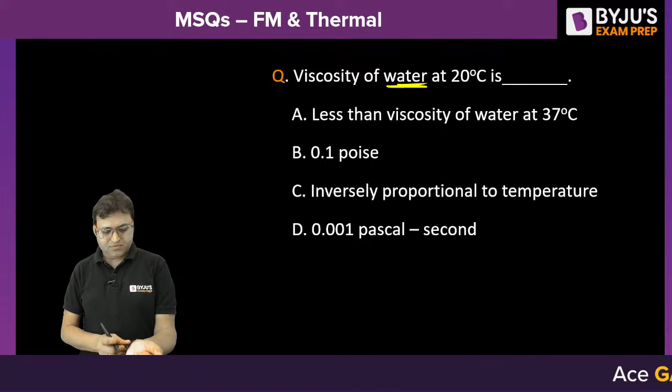Viscosity of water at 20 degrees Celsius. Water is a liquid. Because water is a liquid, can we say viscosity versus temperature? Do you know the relationship between viscosity and temperature?

For a liquid, viscosity decreases with increase in temperature. For a gas, viscosity increases with rise in temperature. This is because in a liquid, cohesive force dominates. I hope you guys are aware of cohesive force. So viscosity at 20 degrees Celsius will be greater than at 37 degrees Celsius.

Is A correct or incorrect? A is not correct. Viscosity at 20 will be more than viscosity at 37. How come A is correct? Rajput, Kumar, why are you saying A? And Sadhana, only B? Remember, all these questions are MSQs.

Viscosity of water is actually 10 to the power minus 3 Pascal second, or we can say 10 to the power minus 4 poise -- sorry, if you want to convert to poise, it is 10 to the power minus 2 poise. Because 1 Pascal second is equal to 10 poise.

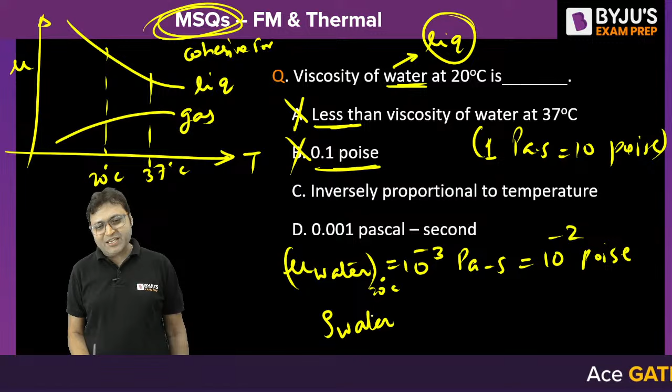Viscosity of water at standard temperature pressure condition, 20 degrees Celsius. Density of water is equal to 10 to the power 3 kg per meter cube. Density is 10 to the power 3, viscosity is 10 to the power minus 3. So 10 to the power minus 3, D is correct. D is correct, and it is inversely proportional to temperature.

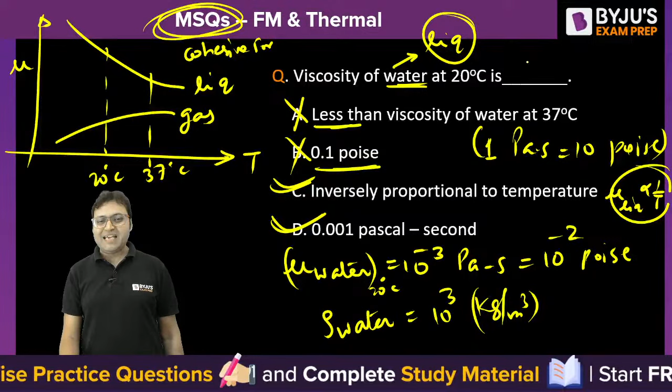Viscosity of a liquid is inversely proportional to temperature. As temperature increases, viscosity decreases. C and D are the correct answers. Nobody gave me the right answer. Do you guys understand it? C and D are the right answer for this one. I hope it is clear.

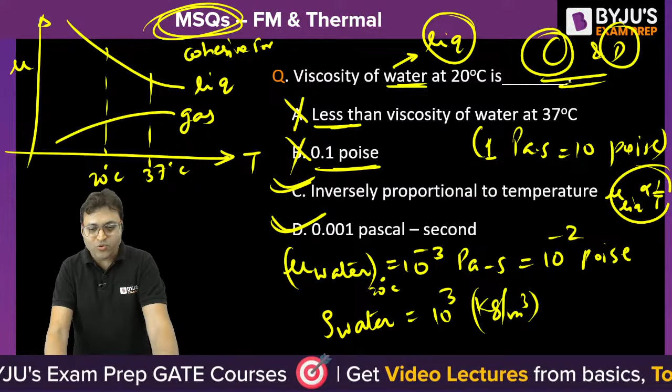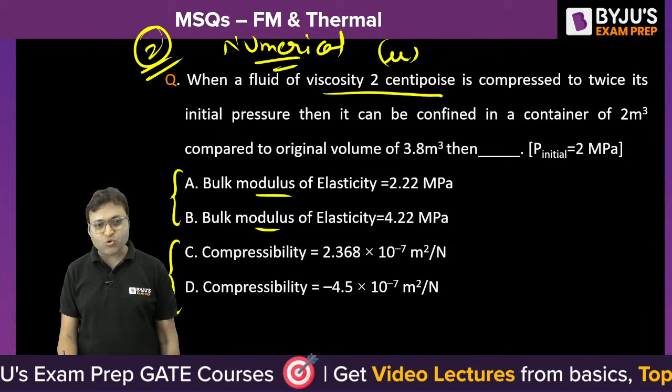When a fluid of dynamic viscosity 2 centipoise is compressed to twice its initial pressure, so P2 is equal to twice of P1, then it can be confined in a container of 2 meter cube compared to the original volume. So V1 is equal to 3.8 meter cube, and the volume gets decreased. When pressure increases, volume decreases, becoming 2 meter cube. Initial pressure was 2 megapascal, so the final pressure becomes 4 megapascal. The question is to find out the bulk modulus and the compressibility.

Do you guys know that the coefficient of compressibility is the reciprocal of bulk modulus? It is the reciprocal of bulk modulus.

That is meter square per Newton. So coefficient of compressibility is reciprocal of bulk modulus. So we need to find out the bulk modulus first, isn't it? So what is the bulk modulus? K is equal to direct stress upon volumetric strain.

Change in pressure per unit change in volume per unit volume. Initial volume is 3.8. What is change in pressure? P2 minus P1, 4 minus 2. That will be megapascal upon change in volume, initial minus final, because there is a negative sign. Why is there a negative sign? To make K positive. So it will be 3.8 minus 2.

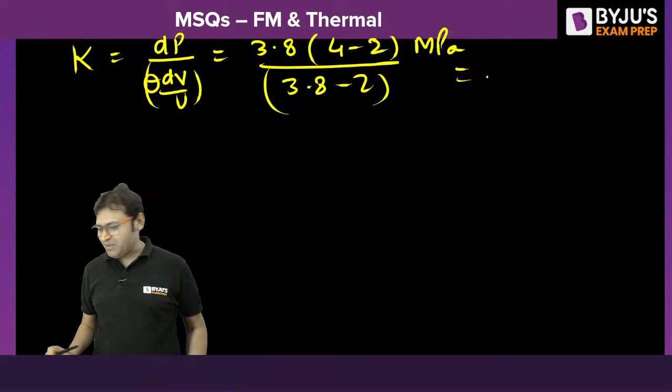Can you solve it? What will be the answer? What will be the bulk modulus? I am waiting for your answer for question number 2. 2 into 3.8 divided by 1.8. It will be 4.22 megapascal. The bulk modulus is 4.22 megapascal. B is the correct answer.

And what is compressibility? 1 upon K. What is megapascal? The options for compressibility are in Newton per meter square or Pascal. So 1 megapascal is equal to 10 to the power 6 Pascal. So 1 upon 4.22 into 10 to the power 6, that is meter square per Newton. 1 divided by 4.22, that is 0.237. 0.237 into 10 to the power minus 6, or we can say 2.37 into 10 to the power minus 7 meter square per Newton. That is coefficient of compressibility.

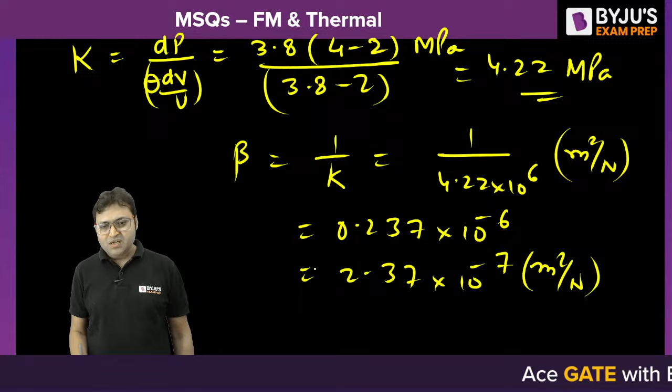Bulk modulus is 4.22 and coefficient of compressibility is 2.37 or 2.368 into 10 to the power minus 7. B and C are the correct answer for question number 2, isn't it?

Yes or no? Hi Maniket, welcome. Good evening, how are you? How was your weekend? How is your preparation going on?

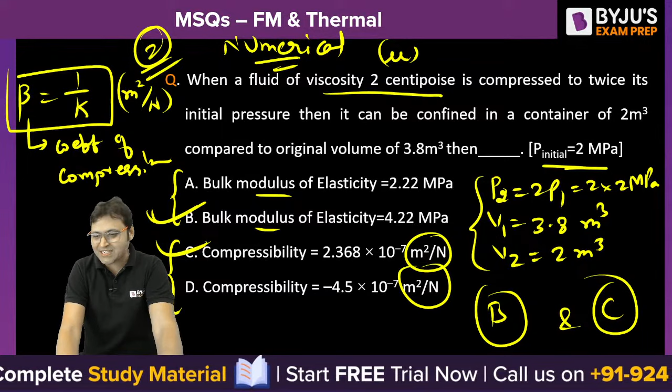Is this all clear to everyone? Everybody please respond me so that we can move to the next one, question number 3. Is this all clear? Simple question, formula based, but because it is MSQ, that makes the question a little complicated.

All right, the next question, theoretical question from the concept of buoyancy. Very, very important concept. Now I am not going to give you the answer. I want you guys to give me the answer for this one.

Yes, Pradeep, Rajput Kumar, Maniket, Archana, give me the answer for this one. Yes, Meg, Bhavya, well done. This is the short trick, the trick to memorize the condition for stability of a floating body.

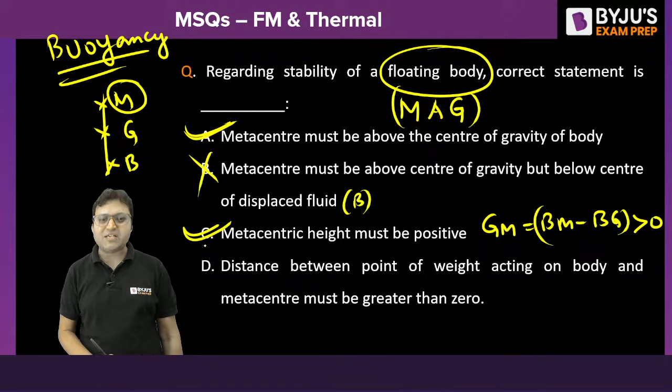Metacentric height must be positive. What is metacentric height? GM, that is BM minus BG. That should be positive. Yes, that is the condition for stability. C is also correct. Distance between point of weight acting on the body...

What is the point of weight acting on the body? Do you agree that is G? And metacenter, that is M, must be greater than 0. What does that mean? Indirectly it is saying GM should be positive. C and D are same statements. Statement C and D are the same.

Statement C and D are the same. The distance between the point of weight acting on the body is G, the point of application of weight is center of gravity, and metacenter M must be greater than 0.

So A, C and D are correct. As long as you are selecting only A and C, you will not get the marks. All the correct options must be selected. A, C and D - are you getting it? C and D are same statements, so if C is correct, D will also be correct.

This was question number 3. I hope it is clear to everyone. Are you guys enjoying it or not?

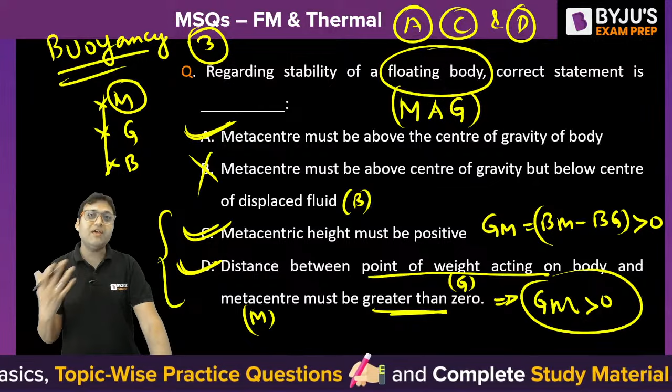The next question, question number 4, is again from buoyancy. Question number 4 is on your screen. Read the question very carefully and try to solve it. Again it is a numerical. Out of A and B, one option will be correct. Out of C and D, one option will be correct.

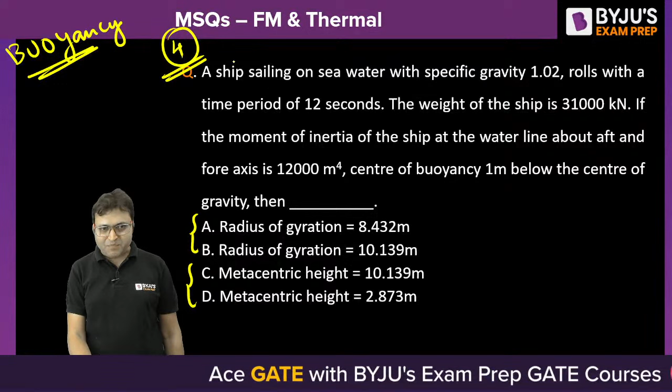There is a ship, a floating body, sailing on the sea water with a specific gravity of 1.02. It means the density of the water is 1020 kg per meter cube. Sea water is slightly denser than normal water because of salt addition, so we need to take the density of sea water to be 1020.

It rolls with a time period of 12 seconds. What is the time period of oscillation? The floating surface always oscillates about the metacenter due to slight disturbance, and the time period of this oscillation T is 12 seconds. The weight of the ship is 31,000 kilonewton.

The moment of inertia of the ship at the water line about the aft and fore axis is IXX, the area moment of inertia of the horizontal section of the floating surface on the fluid surface, and the center of buoyancy is 1 meter below the center of gravity, meaning the distance between B and G is 1 meter.

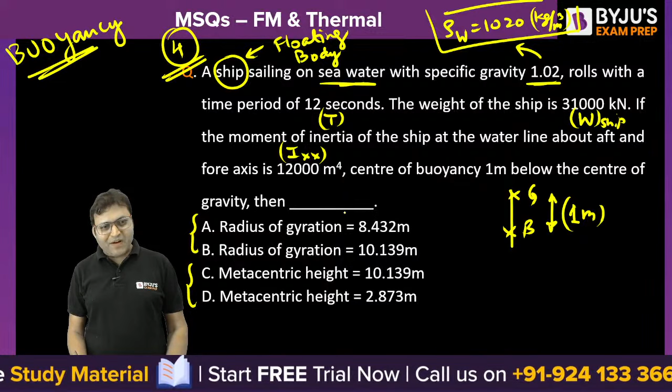Then what is the radius of gyration of the ship and the metacentric height? How do we find the radius of gyration? From the time period of oscillation formula, 2 pi under root of Rg square upon G into Gm, we will find the radius of gyration once we get the value of metacentric height. So first, try to find the metacentric height. Let me make some space. Everybody please give it a try.

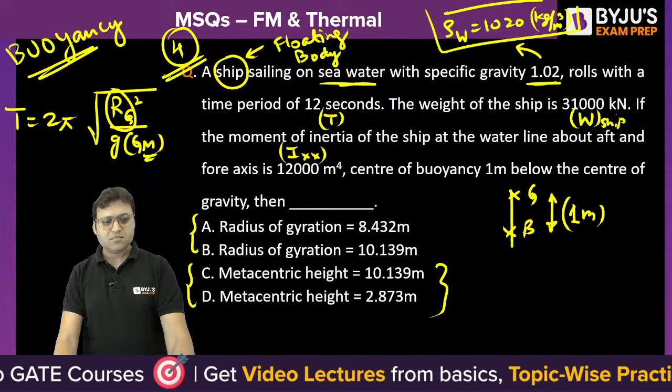Gm, the metacentric height, is Bm minus Bg, and Bm is equal to Ixx upon volume of fluid displaced. Bg is 1 meter. Ixx is known, so what is the volume of displaced fluid? This can be calculated. The buoyant force should be equal to the weight of the ship for vertical equilibrium.

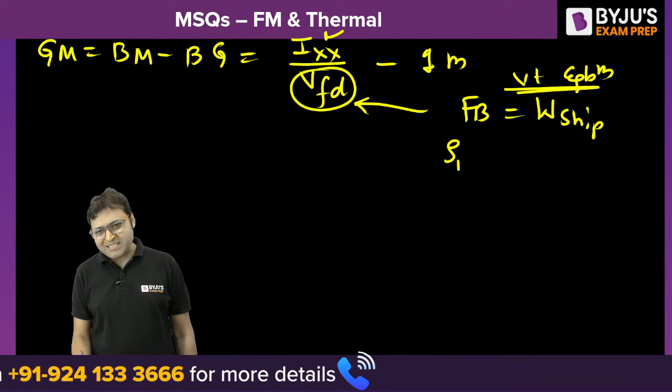For vertical equilibrium, weight must equal buoyant force. What is the buoyant force? Density of water into G into volume of fluid displaced equals weight of the ship. So first we find the volume of fluid displaced. What is the weight of the ship? 31,000 kilonewton, that is 31,000 into 10 to the power 3 Newton.

Density of water is 1020 into 9.81. This will give the volume of fluid displaced. First find the volume of the fluid displaced: 31,000 into 1000 in Newton, divided by 1020 density of water into 9.81 G, giving 3098.08 meter cube. That is the volume of the displaced fluid.

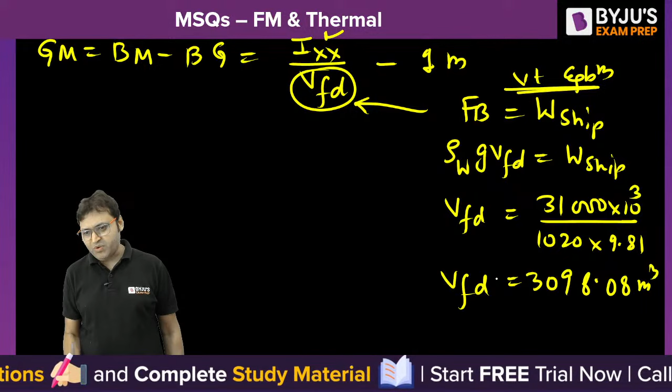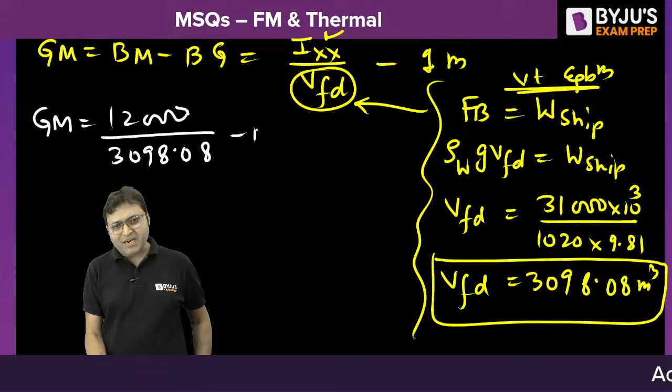Once you get the volume of displaced fluid, Gm will be equal to Ixx, given as 12,000 meter to the power 4, divided by 3098.08, minus 1 meter. Can you find Gm? What will be the value of Gm? Are you getting 2.873? Gm will be 2.873.

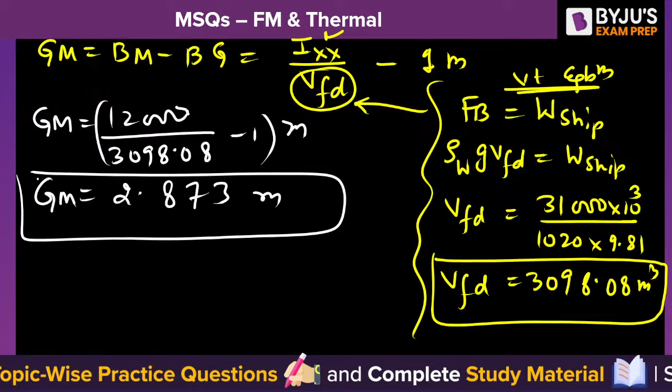Are you getting 2.873 meter? Gm will be 2.873, so definitely D is the correct answer. Option D will be the correct answer.

I hope it is clear, right?

Now what next? Next we need to find out time period of oscillation, 2 pi under root of Rg square upon G into Gm. So Rg will be equal to T into under root of G into Gm upon 2 pi.

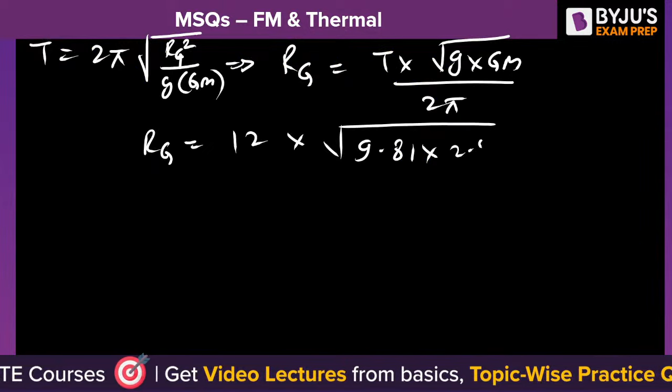So Rg will be equal to, what is the time period of oscillation? Time period of oscillation is 12 seconds. 12 into under root of 9.81 into metacentric height 2.873, divided by 2 pi. That will be in meter.

Can you find out Rg, radius of gyration? Yes, can you solve it? Into 9.81 under root of this, then into 12 divided by 2 pi.

10.139. The radius of gyration is 10.139 meter. Are you guys getting it or not? Everybody, please do let me know.

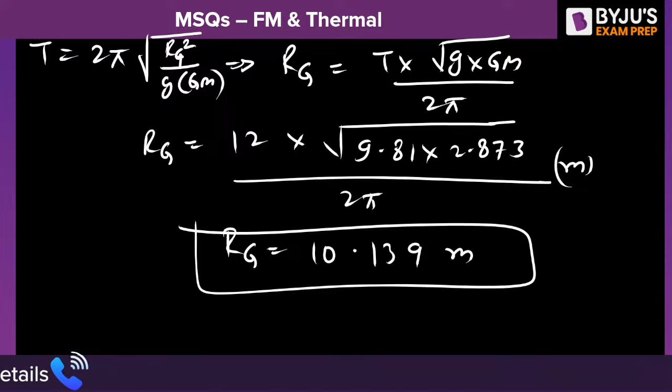10.139. Yes. So B and D are the correct answer for this one. I hope it is clear. Yes or no? Everybody, please do respond. Is this all clear to everyone?

Nobody had given me the correct answer for this one. B and D are the correct answers.

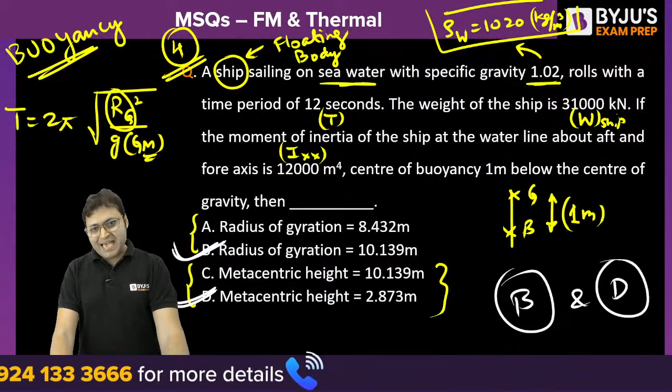The next question is simple. Question number 5. Yes, I want you guys to give me the answer for question number 5. Very simple question. Conceptual, beautiful question. Simple but conceptual.

The question is from the pressure equation, manometry, hydrostatic force, hydrostatic law and Pascal law. Yes, every one of you, Maniket, Pradeep, Sadhna, Kumar, Rajput, waiting for your response. I am not going to give you the hint, neither I will solve the question here.

It is MSQ, don't forget, it is not MCQ, it is MSQ. There are 4 points. There are 2 immiscible liquids, one is mercury and another will be water. There are 4 points, A, B, C, D. What we need to find out is the relation between the pressures of these points.

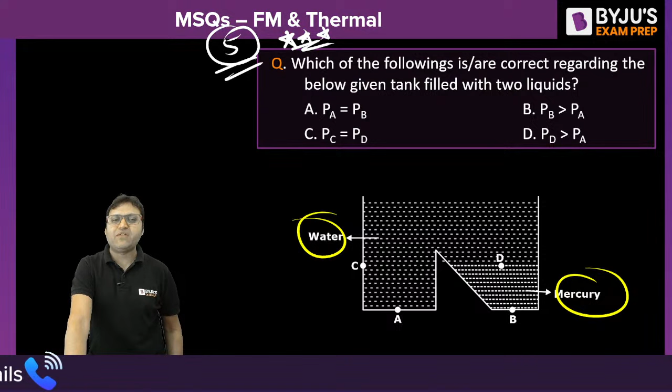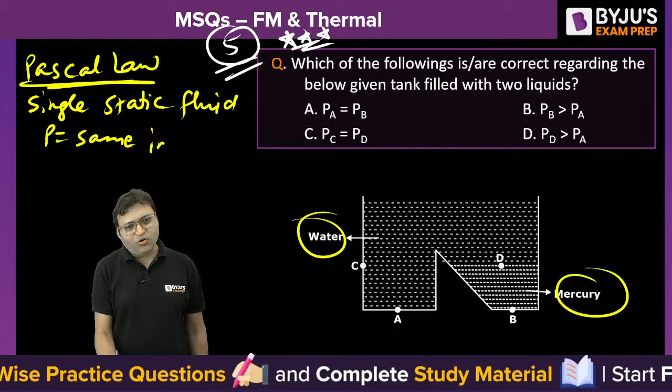What is Pascal law? Pascal law says in a static fluid, pressure remains same in a horizontal plane for a continuous mass of same static fluid. For a single static fluid, pressure will remain same in a horizontal plane.

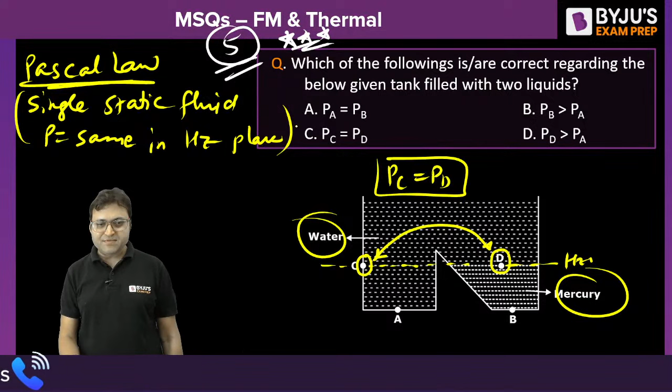So if we draw a line joining C and D, point C and D are part of the single fluid, water. They are part of single fluid and they are lying in a horizontal plane. So definitely PC is equal to PD. No doubt in that. PC is equal to PD. C is correct. Definitely C is correct.

Sadhana, C will be correct. Point C and D will be having same pressure because 3 conditions are important in Pascal law. It has to be a single fluid. The points which we are talking about should be part of a single fluid. The fluid must be static and the plane should be horizontal. So C and D satisfy all the conditions of Pascal law.

C and D are part of the same fluid, that is water. C and D are lying in a horizontal plane and the fluid in the container is static. What about A and B? Will A be equal to B? PA will not be equal to PB.

Why? 2 conditions are satisfied but the third condition is not satisfied between A and B. PA will not be equal to PB because point A is part of water but point B is part of mercury. They are not part of a single fluid. They are part of multiple fluids. So A and B will not be equal.

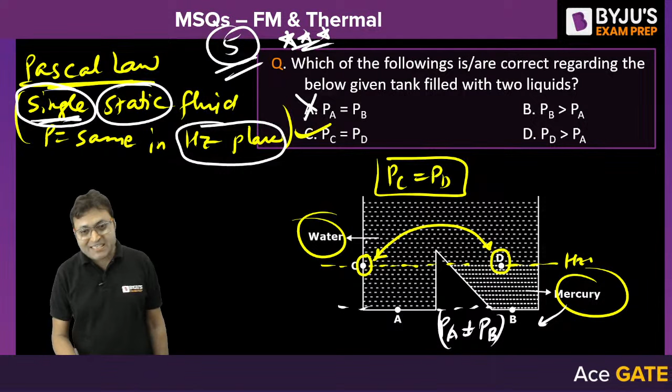Are you getting it? And point C is less than PA. PC is less than PA, isn't it? Because with depth pressure increases, that is called hydrostatic law.

PC will be greater than, or PA will be greater than PC. What about A and B? If A and B are not equal...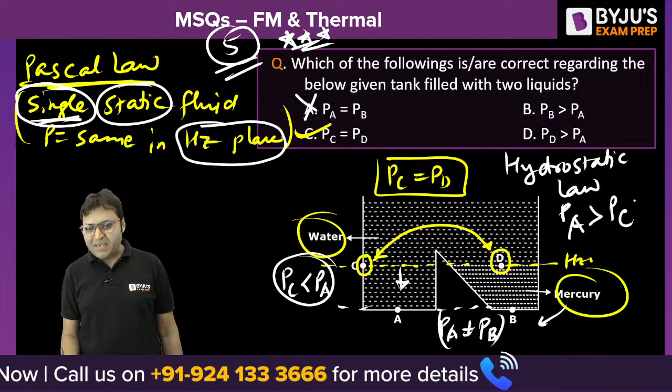PA is greater than PC and PC is equal to PD. So PA will be greater than PD. D cannot be true, since PA will be greater than PD, isn't it?

Now, how to use the hydrostatic law? Try to understand. If we want to write pressure at C in terms of pressure at A: PA is equal to PC plus rho of water into G into H, let me call this distance H. And what is PB? PB is equal to PD plus rho of mercury into G into H.

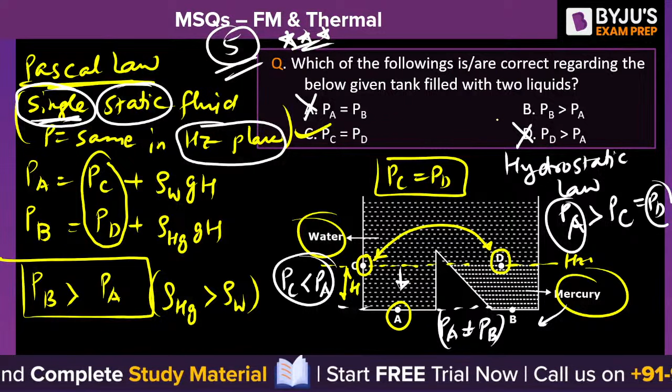PC and PD are equal, because the density of mercury will be greater than density of water, so we can say PB will be greater than PA. Do you agree? So B is correct. This is how we write the pressure equation using the hydrostatic law. I hope it is clear.

So for question 5, the answers will be B and C. How many of you had given me the correct answer? B and C? Rajput had given me the right answer. Well done, Rajput. Others have not given me the right answer for this one.

Question number 5, let us move to the next question. Clear? Whatever mistakes you guys have committed, please understand and rectify those mistakes. Do not repeat those mistakes again in the future. Try to understand the concepts of Pascal law and hydrostatic law in an in-depth manner.

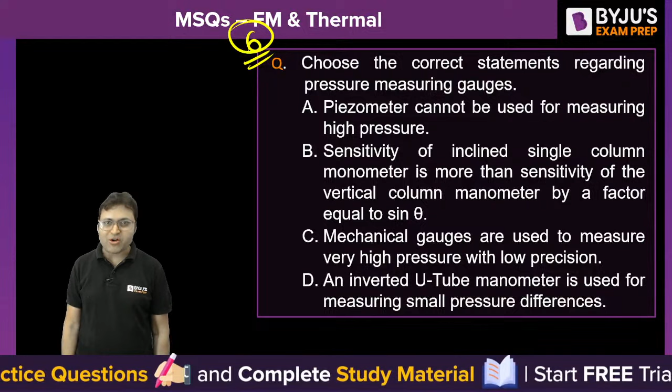Question number 6, waiting for your answer. Bhavya, Rajput, Maniket, Kumar - this is a theoretical question. Theoretical questions are more confusing, or numericals? I assume everybody is finding difficulty in theoretical questions, isn't it? Numericals are simple - using the formula, either you will get the answer or you will not.

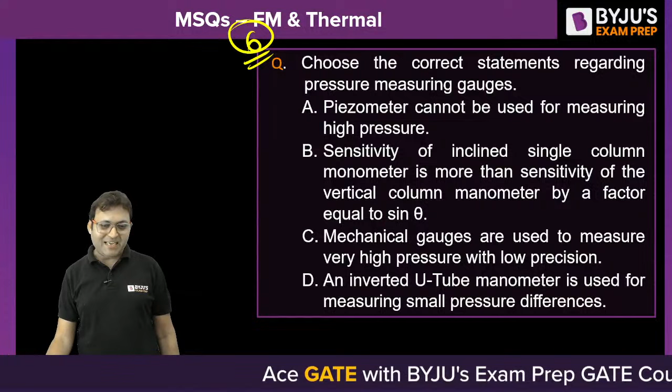That is pretty clear. But in theoretical questions, there is a lot of confusion. Some part of the option might be looking correct, some part of the option might not be looking correct. Yes.

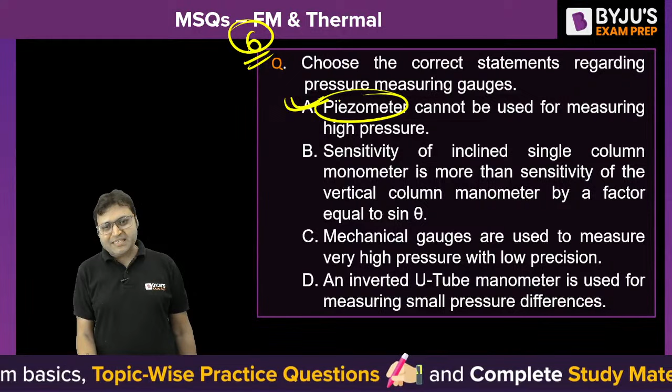Piezometer cannot be used for measuring high pressure - that is correct, A is true. Why is A true? Because a piezometer is an open-ended tube. So if we use the piezometer for measuring very high extreme pressures, what will happen? There might be an overflow, the liquid might overflow. So we do not use the piezometer in case of measuring very high pressures. Also, we cannot use the piezometer for measuring gas pressure, and we cannot use it for measuring negative gas pressures - pressures less than atmospheric, or vacuum pressure. So the piezometer has a lot of limitations.

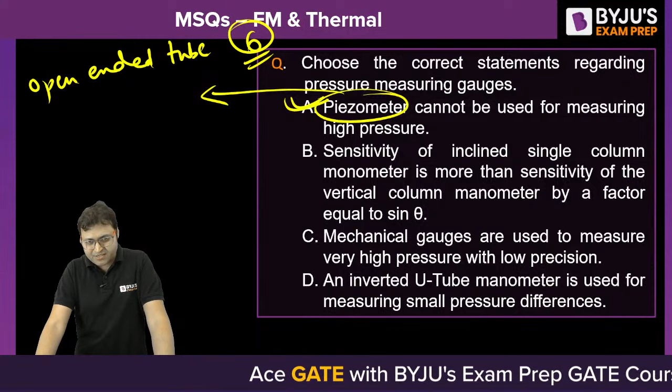Now option B says the sensitivity of an inclined single column manometer is more than the sensitivity of a vertical single column manometer. That is correct, by a factor equal to sine theta - no, it is 1 by sine theta.

Sensitivity is equal to 1 upon sine theta, that is L by H2 sensitivity. And what is theta? Theta is angle with vertical.

So as the theta increases, sine theta will increase, so sensitivity will decrease. Theta is the angle with the vertical. So B is not correct, B is partially correct, 1 upon sine theta, B is not completely correct.

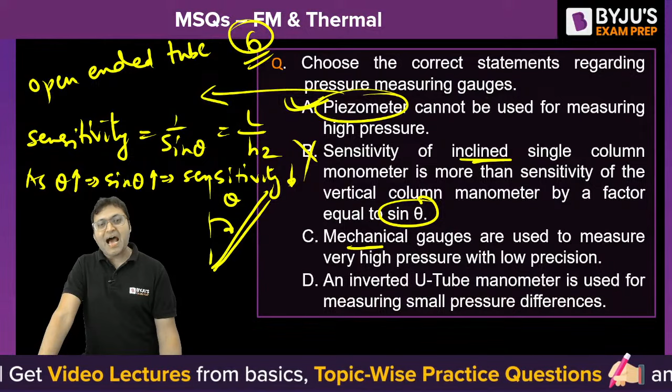B is partially correct. Mechanical gauges - there are two types of instruments. One is the manometer, which is based on the principle of balancing the fluid column, using Pascal's law and hydrostatic law. The other are mechanical gauges, used to measure very high pressures. Yes, we use mechanical gauges for measuring very high pressures, but the problem with mechanical gauges is they have low precision.

C is correct. An inverted U-tube manometer, because the density of manometric fluid is less than density of the flowing fluid, is used for measuring small pressure difference. That is true. Single column manometer as well as inverted manometers are generally used for measuring very low pressure difference. So A, C and D are correct - ACD.

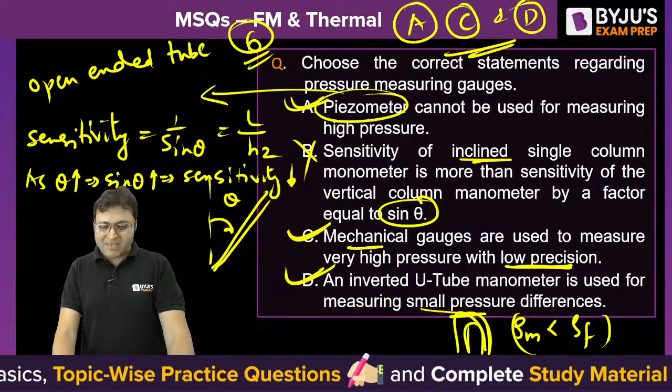If you want to get the right answers or the marks for MSQs, you should have an in-depth understanding of the concepts. There is a numerical now. This is a numerical MSQ.

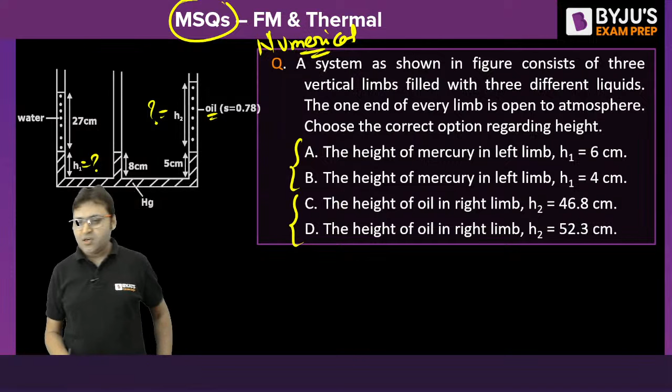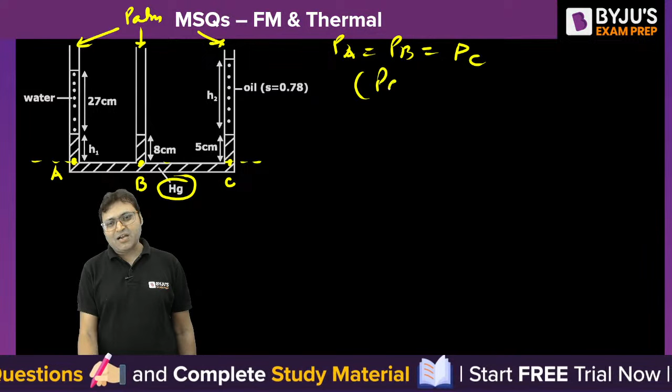So at the bottom there is mercury and all limbs are open to the atmosphere. So at the top the pressure is Patm and at the bottom there is a single fluid. Can we say this pressure at point A will be having the pressure at point B same as the pressure at point C? PA is equal to PB is equal to PC. That is according to Pascal's law, isn't it?

So how to write PA, how to write PB, how to write PC? Starting from Patm, in the left limb Patm, plus we are traveling in downward direction, so plus we are traveling in water into G into 0.27. We are here, then we are further traveling in downward direction, plus this is the datum line, we can call it the datum line. We can use the datum line method. So we are traveling in mercury, rho of mercury into G into H1. That is PA, which will be equal to PB.

So that is Patm plus rho of mercury into G into 8 centimeters, 0.08 meter, is equal to the second expression, that is PB. That is PB is equal to PC. Patm plus we are traveling in downward direction, so plus we are traveling in oil into G into H2, we are further traveling in downward direction, now it is mercury into G into 5 centimeters, 0.05. So this is PC. So PA will be equal to PB is equal to PC.

So if we simplify this, Patm gets cancelled out from each and every expression. If we equate these two, then you will get H1. If you equate these two, then you will get H2. So do the calculation. The specific gravity of oil is 0.78, the specific gravity of mercury is 13.6, the specific gravity of water is 1. If you do the calculation, G will not be involved because G is everywhere, remove G. So use density of water, or you can use the specific gravity also.

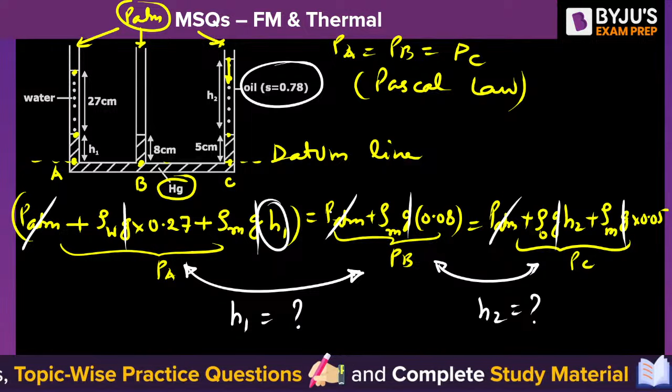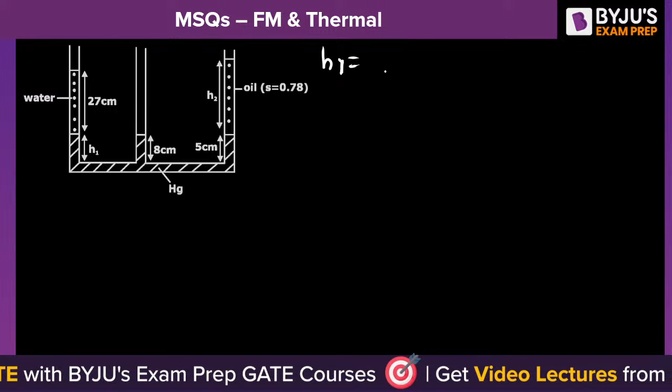H1 will be equal to, what is density of mercury? That is 13.6 into 0.08 minus density of water, that is 1 into 0.27, that is the numerator, divide by denominator rho of mercury, that is 13.6, isn't it? That is in meter.

What is the value of H1? Can you solve it? 13.6 into 0.08 minus 0.27 divided by 13.6. It is 0.06 meter or 6 centimeter. So it is close to 6 centimeter.

A is correct. And what about H2? How to calculate H2? H2 will be equal to 0.08 minus 0.05 upon density of oil. So H2 will be equal to density of mercury 13.6 into 0.08 minus 0.05 upon specific gravity of oil 0.78. That will be H2. What is H2?

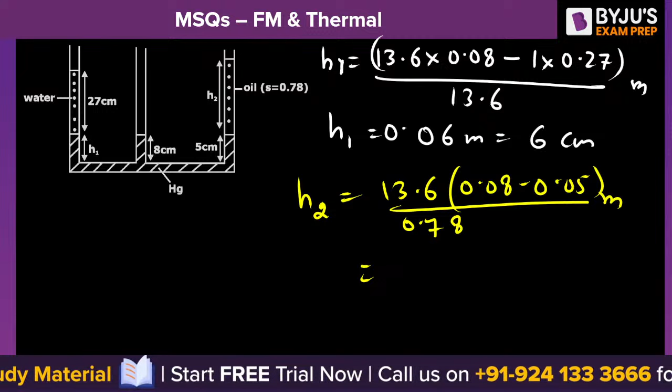13.6 into 0.03 divided by 0.78, that is 0.523 meter. So it is 52.3 centimeter. It will be 52.3 centimeter. A and D are correct. A and D are the correct answers.

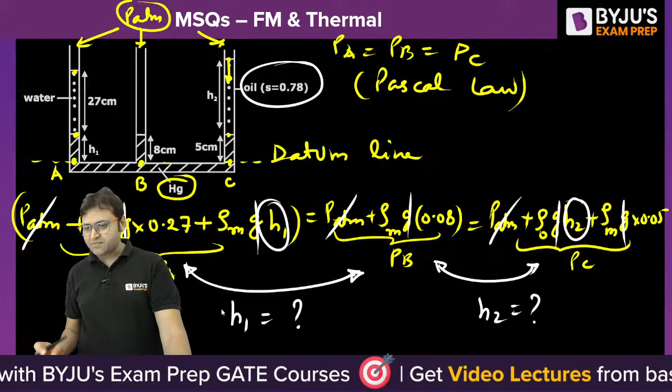Are you getting it? Are you able to understand this equation? I hope you guys are able to understand this equation. A and D. Well done, well done. Good.

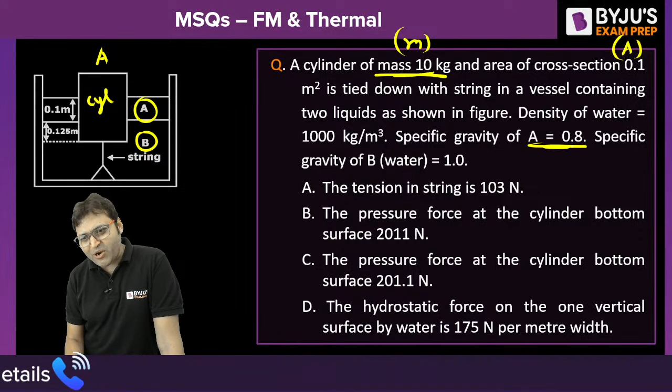What will be the pressure force? Out of B and C, there is only one option correct. Can you solve it? And the hydrostatic force on one vertical surface by water is 175 Newton per meter of width. This is FH, horizontal force. So we need to find out the vertical force. The pressure force at the cylinder bottom is nothing but buoyant force. Can you find out the buoyant force?

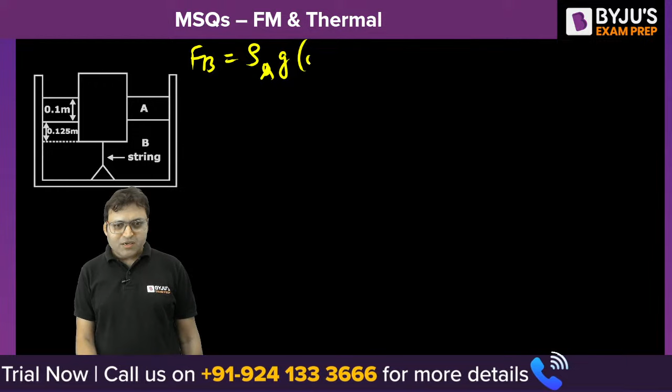So FB will be equal to rho of oil or rho of A into G into volume of A, which is 0.1 into area, plus rho of B into G into 0.125 into area, isn't it? This will be the value. So G into area, what is rho A? 0.8, that is 800 into 0.1 plus 1000 into 0.125 into, let me take G as 10, into area.

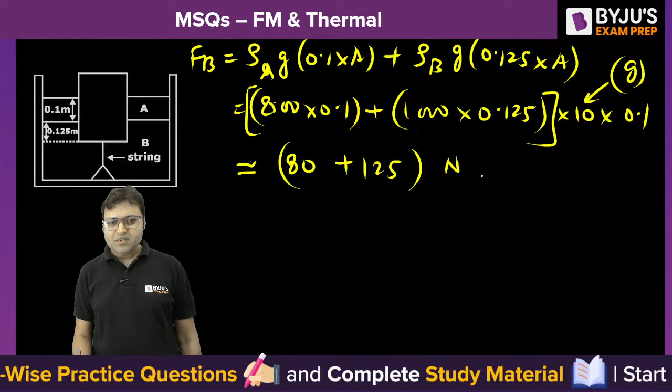What is the area? 0.1, 0.1. I am taking G as 10. So it is around 80 plus 125 Newton. So how much is that? 80 plus 125? Is it around 205 Newton?

So isn't it option C correct? It is close to 201.1 Newton. Why are you not getting the correct answer? Because we have taken G as 10 to keep the analysis simple. So C is the correct answer. C will be the right answer, isn't it? And B is incorrect. Out of A and D, now A.

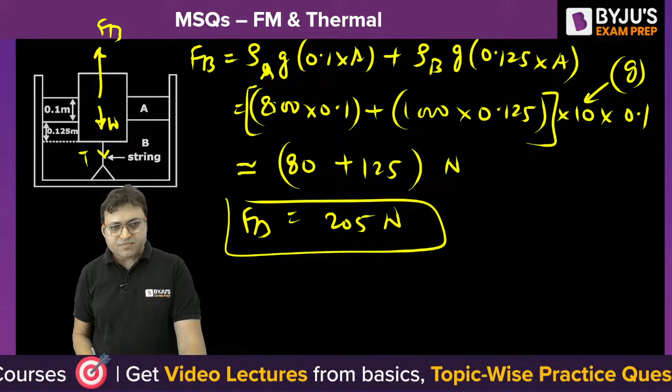If we talk about A, tension. So buoyant force is acting in upward direction, tension is acting in downward direction, weight is also acting in downward direction. So can we find out, can we say for vertical equilibrium, buoyant force is equal to W plus tension. So tension is equal to buoyant force minus W.

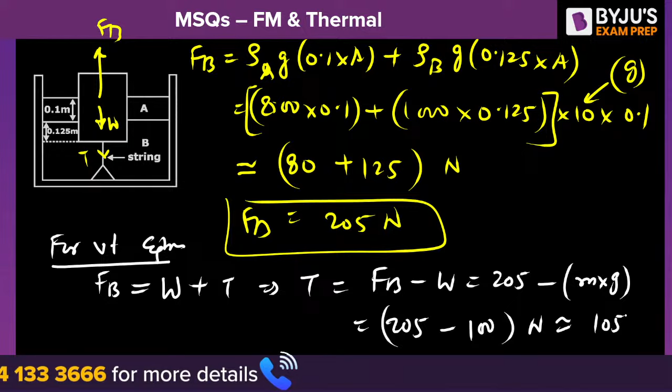What is buoyant force? That is 205 minus W, which is M into G. Let me take G as 10 only. So it is 205 minus mass 10 into G 10, which is 100 Newton. So the tension is 105 Newton. Tension will be 105 Newton. So that is also correct. A is also correct. Now how to find out D?

Let me call the 2 points G1 and G2. Let me call this as G1, let me call it as G2. Horizontal force we are interested in. Can you find out FH? Horizontal force is equal to PG1 into A1, plus PG2 into A2. So what is PG1?

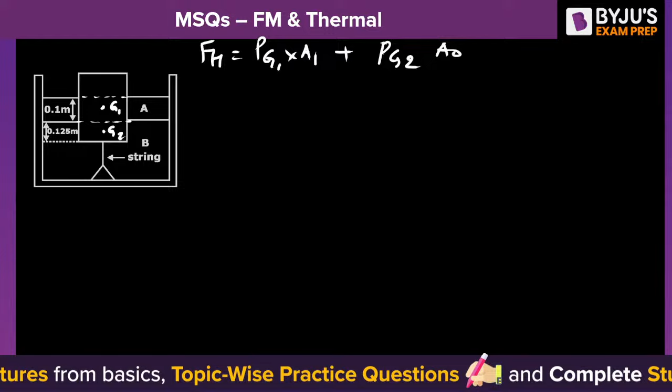PG1 is equal to rho A into G into 0.1 by 2. So rho A is how much? 800. 800 into 10 into 0.1 by 2, that is 0.05 Pascal. So how much is PG1? 8000 into 0.05, that is 400 Pascal.

What about PG2? That is equal to rho A into G into 0.1 plus rho B into G into 0.125 by 2, isn't it? Can you find out PG2? Rho AG, so that will be 400 into 2 is 800. That is 800 plus 1000 into 10 into 0.125 by 2. How much is that? 1000 into 10.

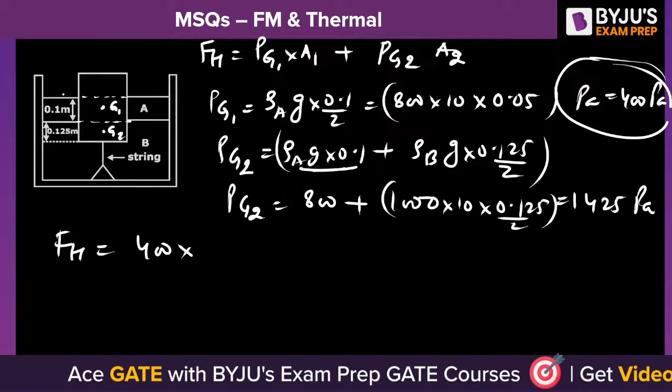125 into 10, 1250 by 2. 625 plus 800 equals 1425 Pascal. Now FH will be equal to PG1, which is 400 into 0.1, plus PG2, which is 1425 into 0.125. That will be Newton per meter.

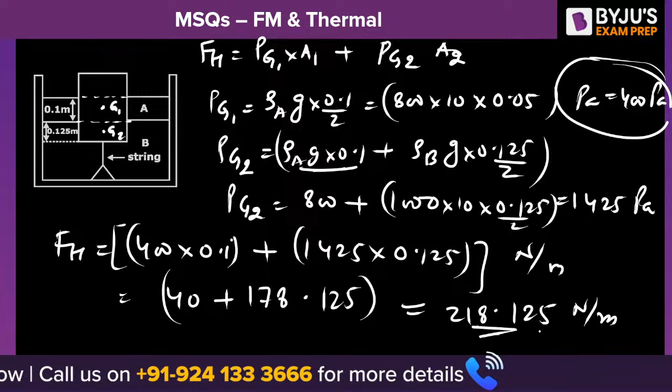So 40 plus 1425 into 0.125 gives 178.125, so that will be almost 218.125. That will be FH, around 218 something. That is incorrect, 175 will not be acceptable. It is around 218.125. Yes, that is correct. I hope you guys are able to understand this.

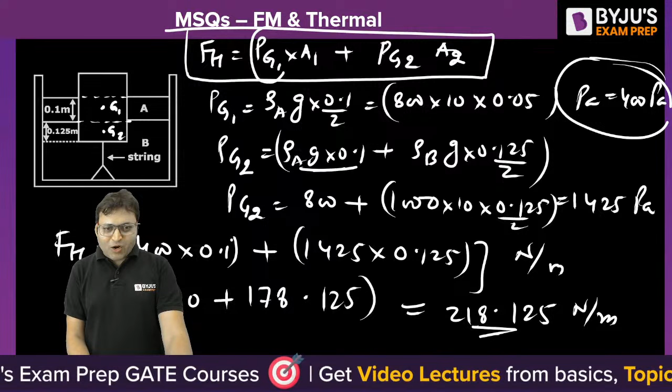How to calculate FH? Find out the average pressure due to liquid A, average pressure due to liquid B. This is how we can find out FH. Is this clear? So only options A and C are correct answers.

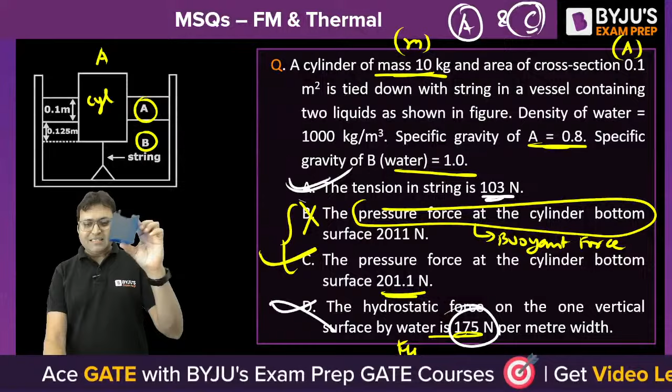It is hydrostatic force by water as well as oil on a vertical surface. Look, this force is this. Let us say this is the body. What was the body? Cylinder. Let us say this is the cylinder. So on this cylinder, the force acting on this vertical surface is 218, due to water as well as due to oil, both water plus oil.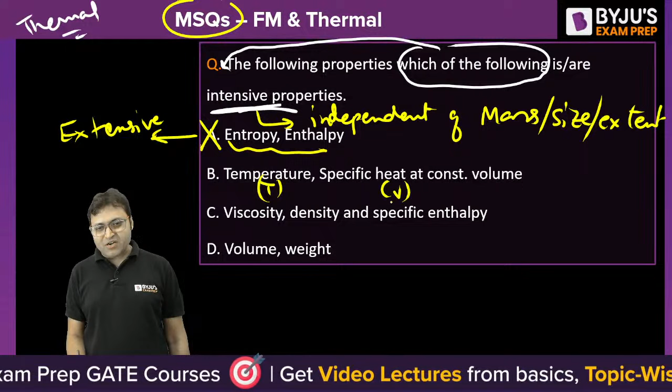It is MSQ, not MCQ. Whenever it is energy, enthalpy, all are extensive properties. Enthalpy, energy, entropy, they are extensive. Temperature, specific heat at constant volume - T and Cv are intensive, independent of mass. Viscosity, density, specific enthalpy are again intensive. Specific enthalpy is intensive, but enthalpy is extensive. Volume and weight are extensive.

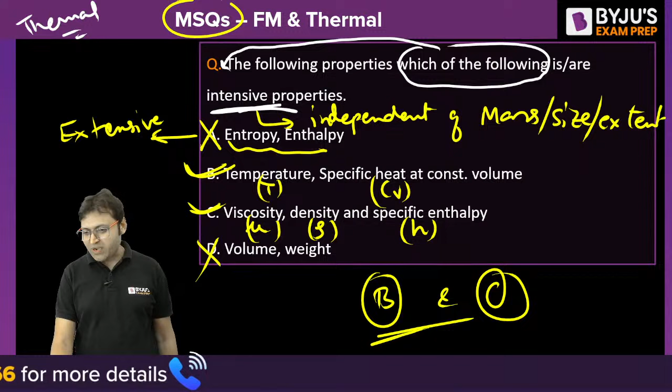So B and C are the right answer. I hope it is clear. B and C will be the correct answer. Entropy and enthalpy are extensive, they depend on mass, size.

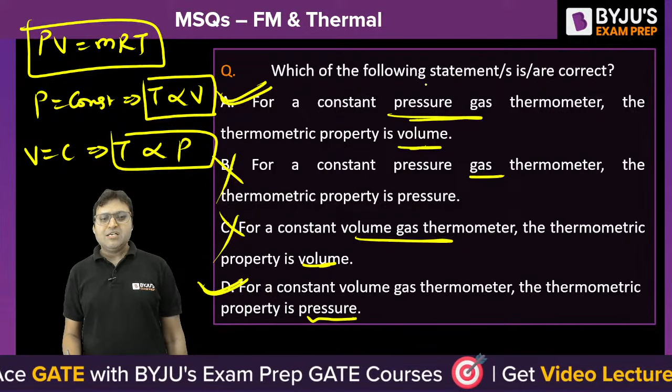Which of the following are correct? For a constant pressure gas thermometer, ideal gas thermometer, PV is equal to MRT. So if pressure is constant, then temperature will be obtained from volume - the thermometric property is volume, that is true. For a constant volume gas thermometer, if volume is constant, then temperature will be obtained from pressure, so the thermometric property will be pressure, not volume. So A and D are the correct answer. Well done, guys.

The next question again, from the zeroth law of thermodynamics. What is the zeroth law? That gives us information about equality of temperature. If a system A is in thermal equilibrium with system B, and system B is in thermal equilibrium with system C separately, then A and C will also be in thermal equilibrium. It is about thermal equilibrium, not thermodynamic equilibrium.

50 milliliter of water at 25 degrees Celsius is mixed with 10 milliliter of water at 25 degrees Celsius. So the mixture will also be at 25 degrees Celsius, isn't it? A is true because it is water mixed with water.

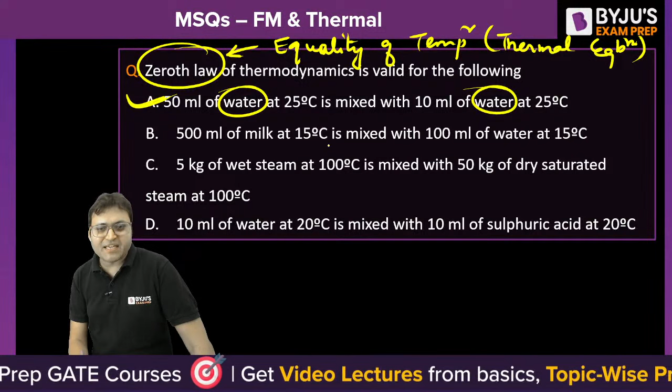500 milliliter of milk at 15 degrees Celsius is mixed with 100 milliliter of water. Milk and water get dissolved, there is no chemical reaction, so they will give rise to 15 degrees Celsius temperature only. 500 milliliter of milk is added to 100 milliliter of water at 15 degrees Celsius, so the final temperature will be 15 only.

5 kg of wet steam at 100 degrees Celsius is mixed with 50 kg of dry saturated steam. Steam means H2O, so option C is also true.

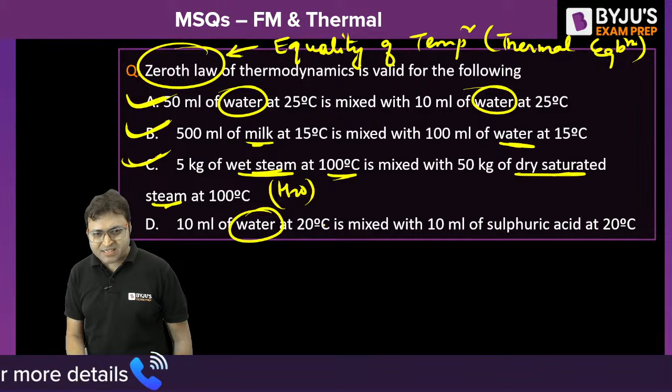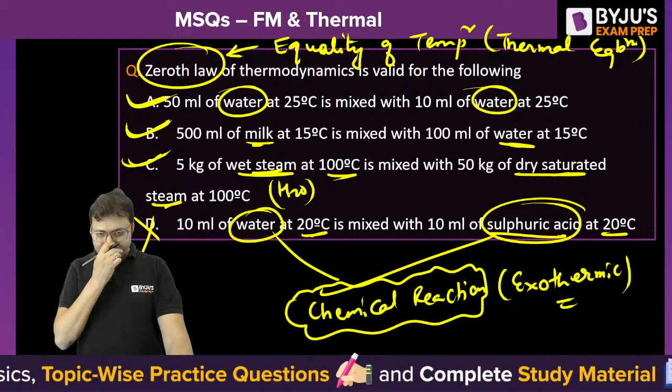10 milliliter of water at 20 degrees Celsius is mixed with 10 milliliter of sulfuric acid. There will be a chemical reaction, and that is an exothermic reaction, so the final temperature will no longer be 20. There is a chemical reaction, so they will not be in thermal equilibrium. D is not correct because there will be a chemical reaction taking place; sulfuric acid reacts with water and generates heat, so there will be variation in the final temperature.

A, B and C will be the correct answer. One more question, the next one.

A student living in a 4 meter by 6 meter by 6 meter dormitory room turns on her 150 watt fan before she leaves the room. This is the capacity of the fan. Assuming no heat loss to the surrounding, determine the correct statement. The room is initially at 100 kilopascal and 15 degrees Celsius.

Is the above process an example of flow process or non-flow process? Flow process means open system, non-flow process means closed system, when only energy transfer can take place, not mass transfer. So out of A and B, which option is correct? Out of A and B, B will be correct, it is a non-flow process.

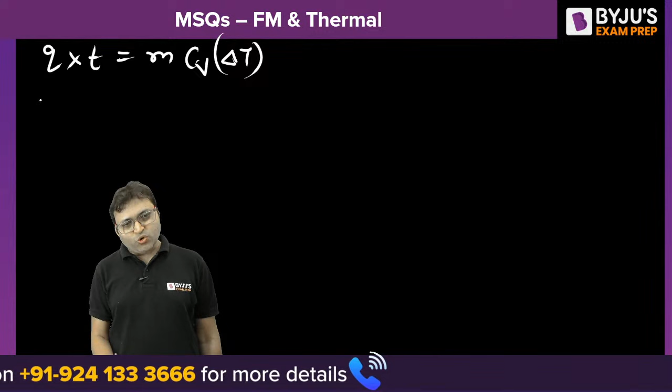Now, is the temperature in the room when she comes back 10 hours later 58 or is it 72? Let us find out. We can say Q into time equals M into Cv, constant volume, into delta T. So Q is 150 watt into 10 hours into 3600. What is the mass? P1 V1 upon R T1, into Cv which is 718, into delta T. T2 minus T1 is 15. Whenever there is a temperature difference, we can write it like this.

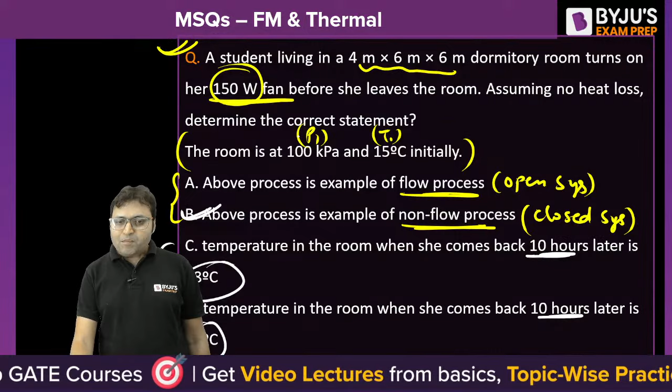So, 150 into 10 into 3600. What is P1? Pressure is 100 kilopascal. What is V1? 4 into 6 into 6, upon R which is 0.287, into T1. Here you need to take 273 plus 15, then into 718 into T2 minus 15.

Can you find out the value of T2? You will get it in degrees Celsius only. Can you do the calculation? T2?

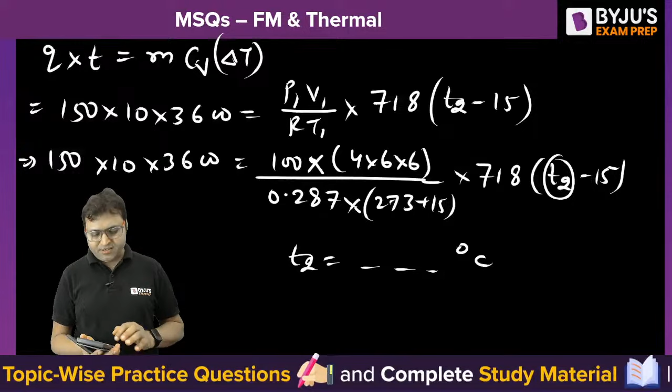Let me do the calculation. 150 into 36,000, then into 0.287 into 273 plus 15, which is 288. Divide by 100 into 4 into 6 into 6.

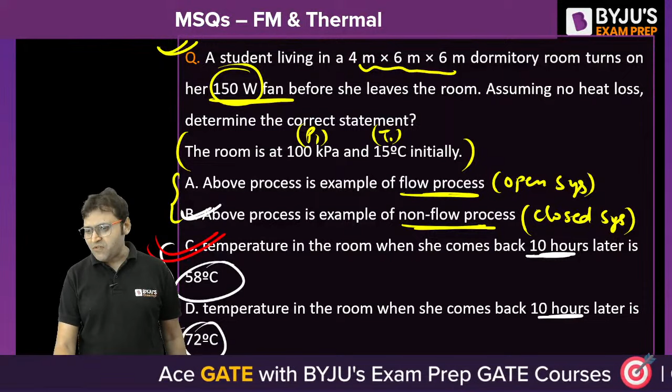Something went wrong. What is the answer? Are you getting 58 something? Are you getting 58 or not? Option C, are you getting something around 58? C will be the correct answer. All right, 58. So the answers to this question are B and C.

B and C. I am about to wrap up. The last question: the condition of stable equilibrium of a floating body.